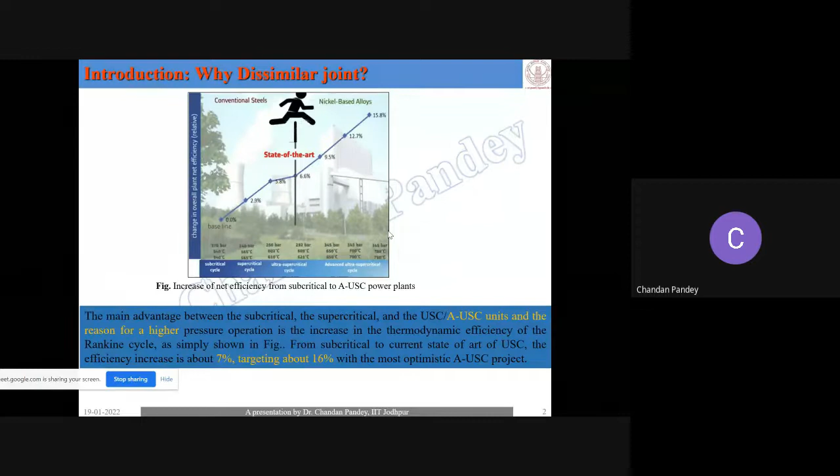So in that case, again, we need dissimilar joining of these two materials. So ultimately, to improve the design and to reduce the material cost, we need dissimilar joining of two different grade materials.

Now, these are the different materials that we use. If we talk about the simple joining of dissimilar materials, the most commonly used dissimilar joining is between chromium molybdenum steel, used in power plants — P91, P92 — and austenitic steel, used in petrochemical industry and others.

Similarly, joining P91, 92 with nickel-based super alloy is used in nuclear grade power plants; austenitic to duplex or martensitic to duplex is used in navy sections and others; copper-steel, copper-aluminum joining is used in aerospace industry.

So there are many industries using dissimilar joining of two different grade materials. The dissimilar material joining has various industrial applications, and it is most frequently used in power plant, chemical and petrochemical industries.

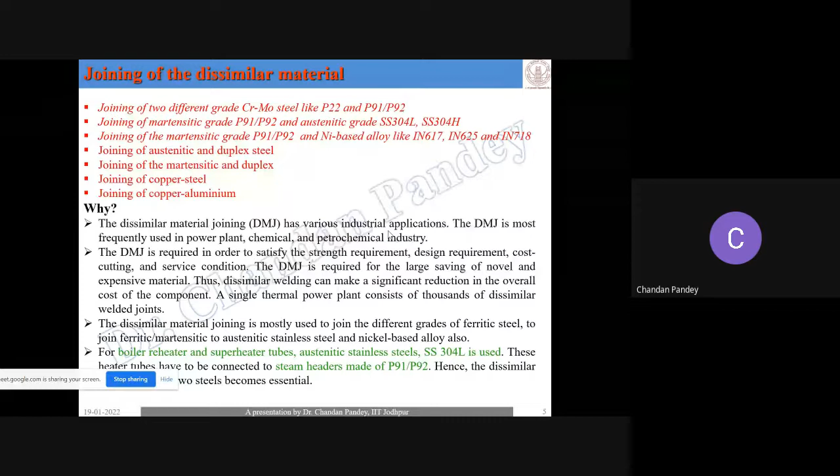Generally we use dissimilar joining to save the novel material and to minimize the cost of that advanced material, and we use different approaches for that.

This is a simple example of a boiler header section where we use two different grade materials exposed at different temperatures. The lower portion, called the steam header, generally operates at a temperature of 600 to 620, and is made of the advanced grade material P91. The upper portion, made of tubes and others, operates at a lower temperature in the range of 450 to 500, and is made of a low alloying element called P22 steel.

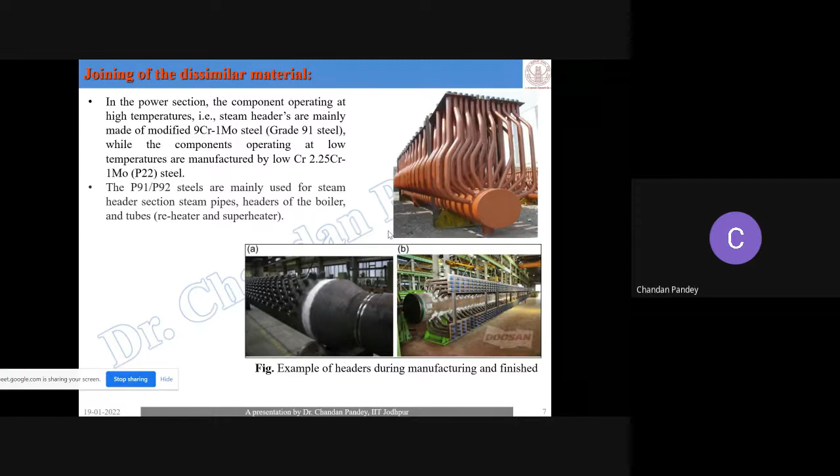Similarly, we use dissimilar joining of materials in other industries also. Now let's come to the topic of design of welded joints — after getting that dissimilar joint, what parameters we consider to design a component or design the welded thing.

Weld joints that we design may be subjected to a variety of loads. First thing that comes to mind when designing anything is the application. The weld joint is subjected to a variety of loads ranging from simple tensile load to complex combinations of torsion, bending, shearing and others.

Similarly, if you talk about high temperature material, it is subjected to residual stresses and high temperature tensile stresses. Once your power plant operates at high temperature and then comes to lower temperature, you will get some amount of thermal stresses and their variation. So there are a variety of applications and a variety of loads where it operates.

The first thing that comes to mind during weld design is the application where we are going to use that joint and what type of loading we are going to apply for that purpose. The capability of that weld joint to take up the given load comes from the metallic continuity across the members being joined.

If you are going to join two members, there should be homogeneity of mechanical property throughout the section. So generally the major problem in a welded joint, if you are going to join two plates or two materials, due to the application of high heat and due to variation in chemical composition, mechanical property, and microstructure, we face so many problems related to heterogeneity in mechanical property.

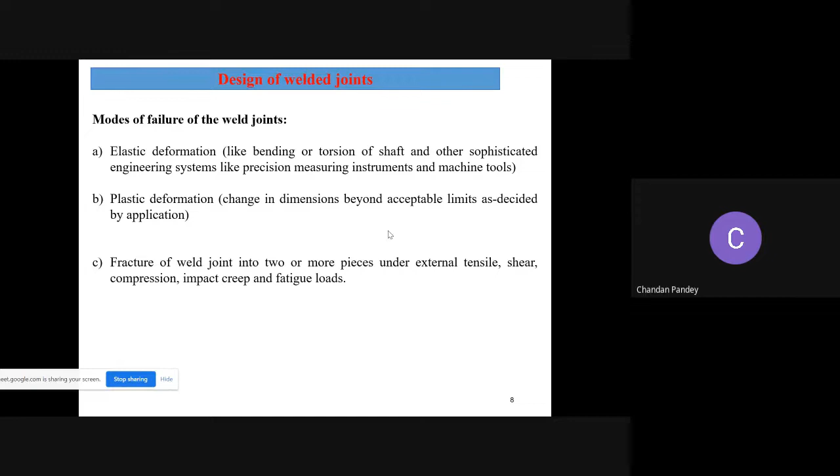While under fatigue and creep conditions, design of a weld joint is based on a specialized approach, which we will discuss later. Under simplified conditions, design for fatigue load is based on the endurance limit of the product. So for different types of loading conditions, we use different criteria to get the final design of the product.

Now, if you talk about the factors which affect the performance of the weld joint - before coming to the design part, I'm discussing the main factors we consider. The welding procedures used for developing a weld joint include edge preparation, plate preparation, weld joint design, type of weld, and number of passes.

First, about edge preparation: generally if your plate thickness is 5 or 8 mm, you can simply join that plate without application of filler metal. There are three different types of welding - I think you all know about these: homogeneous, heterogeneous, and autogeneous. Generally, in case of autogeneous welding, if you are not going to use any filler metal, it comes in the group of autogeneous welding process, and we can simply join the plate just by application of heat. Up to 8 mm, it is easy to fabricate a weld joint, but if the thickness is more than 8 mm, it is not easy to penetrate the heat beyond that.

So in that case, we prepare the edge. We perform edge preparation at the end or side of the plate, and we create different types of groove geometry - V groove, narrow groove, and others.

The first thing we consider is the edge preparation and weld joint design, which comes under the type of geometry used for plates having thickness more than 8 or 10 mm.

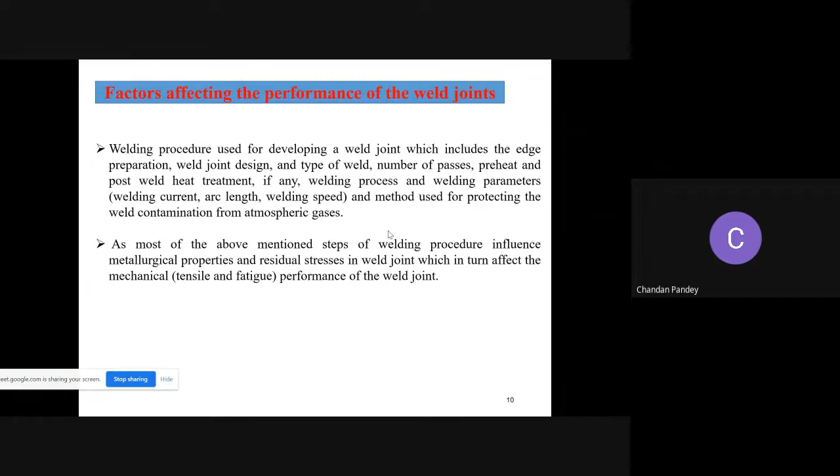So this is about the factors affecting the performance of the weld joint and the parameters that we consider during the design of the weld component.

Now, next, design of weld joint and the loading condition. Design of weld joint for static and dynamic load need different approaches, because in case of static load, it is clear that direction and magnitude become either constant or change very slowly, so we can neglect that. But in case of dynamic loads such as impact, fatigue, thermal stress and others, we get continuous change in loading condition. So the design criteria for the dynamic case will be different compared to the static one.

And in case of fatigue loading, both magnitude and direction of load may fluctuate. So under static loading condition, a low rate of loading increases the time available for localized yielding. That means in case of static loading, once a crack initiates, it takes enough time to propagate, because at the tip of that crack we get plastic deformation.

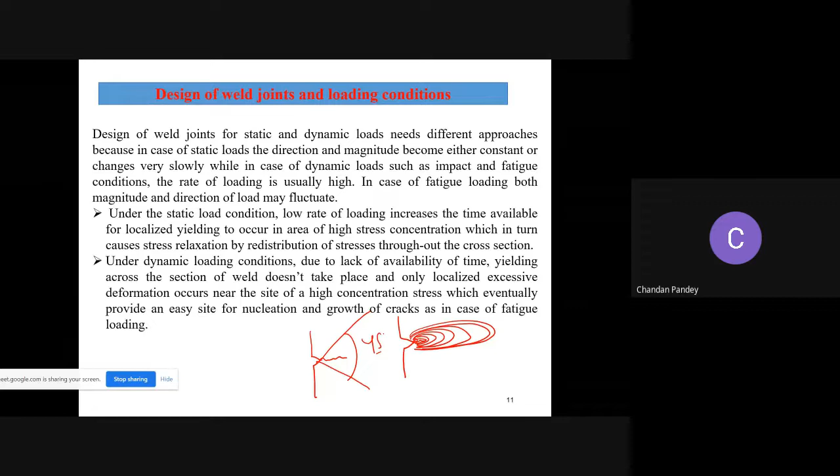But in case of dynamic loading condition, once a crack initiates, you get sudden fracture, and generally it takes place at an angle of 45 degrees. So in both cases, we use different approaches to design, and different weld parameters are considered for the static one and for the dynamic one.

Before that, the next important thing is about the welding symbol and type of welding geometry that we use to get a proper weld joint.

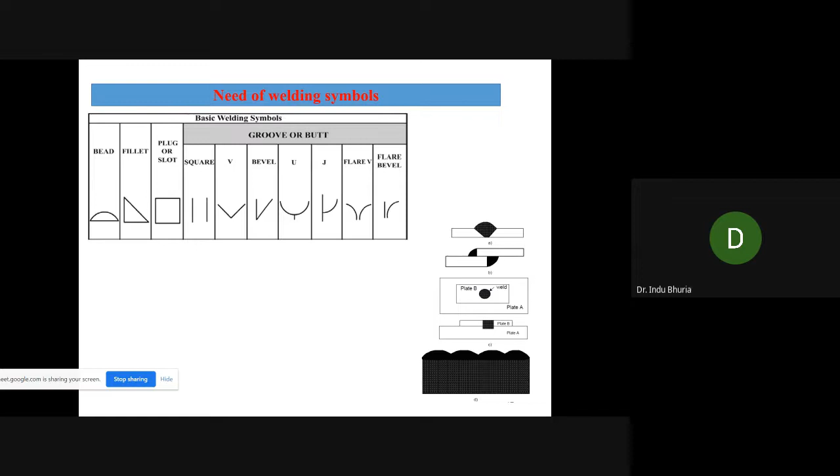So next is about the need for welding symbols. We use different types of welding symbols for different things. The first thing is, welding is not just about joining. Sometimes what we do is utilize filler metal to deposit a layer over the surface of the workpiece to enhance mechanical properties, similar to material science and heat treatment.

If you know about that, there are processes like carburizing, nitriding, cyaniding and others. In those cases, we add elements like carbon, nitrogen and others, and diffuse them into the surface to enhance mechanical properties, especially wear resistance and hardness of the material. Similarly, in welding, we can utilize filler metal or filler rod to enhance the mechanical property of the surface.

So if you are going to deposit a layer over the surface of your workpiece, that is called bead on plate, generally represented by the first one, your bead on plate, just a deposited layer over the surface of the workpiece to enhance mechanical properties.

Especially during the process of joint design, the important thing we consider is the welding parameter and the weld bead geometry. So generally, if you want to optimize the welding process parameters on the basis of weld bead geometry, here's what we do.

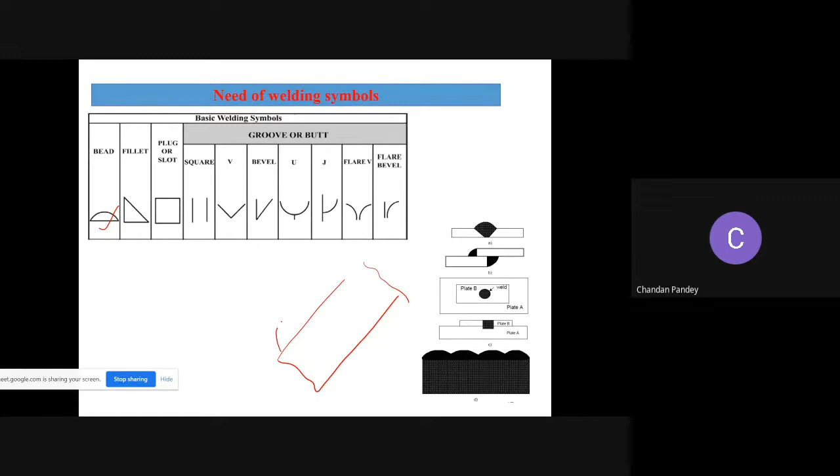For different parameters, suppose this one is the plate, and for different welding parameters we deposit a layer over the surface of the workpiece. After that we cut a cross section, and after grinding, etching and polishing, we check the depth of penetration and bead width.

So generally, on the basis of that depth-to-width ratio, we select the optimum welding parameter for that process. So that is about your bead on plate.

Second one, that fillet weld—in that case both plates will not be in the same plane. And plug or slot, that we use in case of your resistance welding process.

After that, the most commonly used one, that is your butt joint. In your butt joint, there are so many symbols: square, V, bevel, U, J, and others. So generally, if you talk about the square joint—if you are going to produce a weld joint without any edge preparation, without creating any groove—that comes in the group of your square butt joint.

We use that in case of laser welding, electron beam welding, or autogenous gas tungsten arc welding process. Now it is suitable for plate thickness up to 8 or 10 mm. If the thickness is more than that, we create a different type of groove geometry, and on the basis of the groove geometry we use different types of symbols.

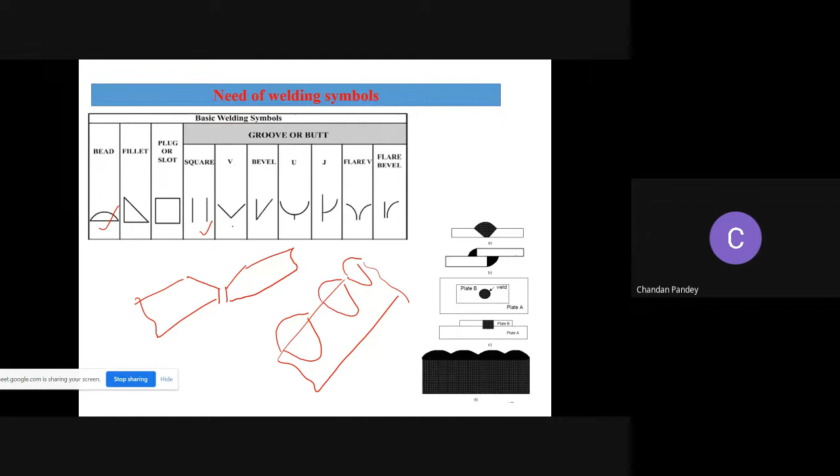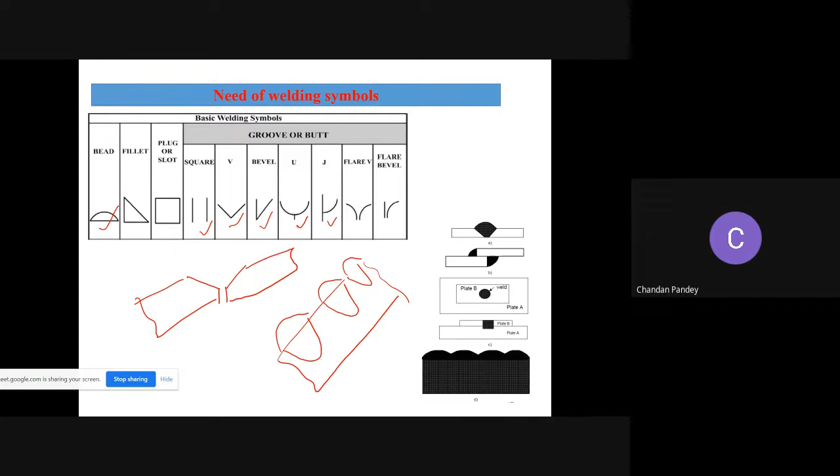Suppose the groove geometry is like this: this one is your first plate and this one is your second plate. So here the geometry, the symbol that we use, that is called your V groove. If we create the geometry in one plate and the other plate remains as such, then it is called your bevel. After that we create U, J. Later I will discuss their advantages and disadvantages, why we are going to create that one.

Now, the next thing we consider in weld joint design is the type of joint we are going to produce during the process. There are 5 types of joints we use in welding: butt joint, lap joint, corner joint, edge joint, and T joint.

Now, if you talk about the butt joint—if both plates are in the horizontal plane and aligned with a maximum deviation of 5 degrees, then this joint is called your butt joint. The maximum deviation allowed is about 5 degrees.

After that, your lap joint: if the plates overlap, meaning both plates are not in the same plane, then it is called your lap joint. Here, this is about your lap joint.

Corner joint—that is made by melting the corner of 2 plates being welded, and therefore the plates are approximately perpendicular. Here we can keep the angle in the range of 75 to 90 degrees.

If we talk about the edge joint, that is made by melting the edges of 2 plates to be welded, and therefore the plates are almost at an angle of 0 to 5 degrees.

And T joint—if both plates are at 90 degrees, then we can say that is about your T joint. So these are the common types of joints that we use in the welding process.

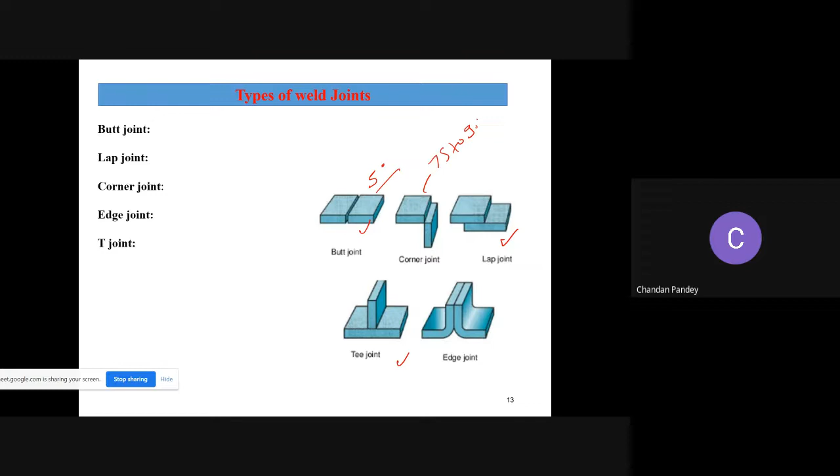Now, the next thing we consider about weld joint design is the welding position, meaning in which position we are going to perform the welding. So in welding, that is very clear—that is about the transfer of metal.

If we draw a simple rough diagram of welding—suppose this one is the plate, and here there is the filler metal. With the help of the filler metal, we deposit a layer over the surface of the workpiece. Now this is not just about the deposition of the layer—there are a number of forces involved during the transfer of the molten metal from that tip to your workpiece surface.

Especially we consider 2 types of force: one is your gravity force, and one is your surface tension force. Now, in case of welding, generally your gravity force acts in the downward direction, acting as a detaching force, and it allows the flow of molten metal from your electrode tip to your workpiece surface.

If we talk about the surface tension force, that acts as a retaining force and retains the liquid metal droplet at the tip of your electrode surface. So generally, we get the transfer of metal from the electrode tip to the workpiece surface when the surface tension force reduces, or you can say when the gravity force exceeds the surface tension force. So now the welding position plays a major role during the transfer of the metal.

In flat welding process, the plates to be welded are placed on a horizontal plane, and the weld bead is also deposited horizontally. This is one of the most commonly used and convenient welding positions to get a proper weld joint. In flat position welding, it is easy to transfer the liquid metal droplet from the electrode tip to the workpiece because gravity acts in the downward direction.

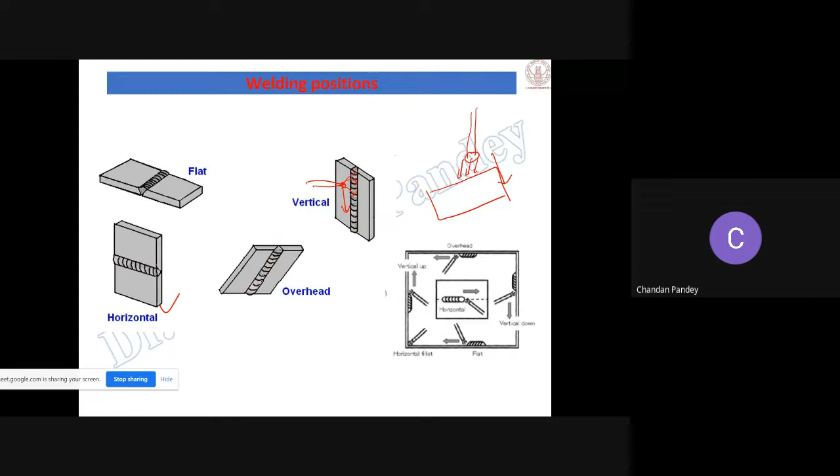Now, after that, the next one is about groove application. For this, which type of groove is required depends on thickness - up to 8 mm thickness is okay, and by using autogenous welding we can make the joint. But if the thickness is more than that, we prepare a groove, generally U, V, and J type grooves. So here we prepare two types of groove: either single groove weld or double groove weld.

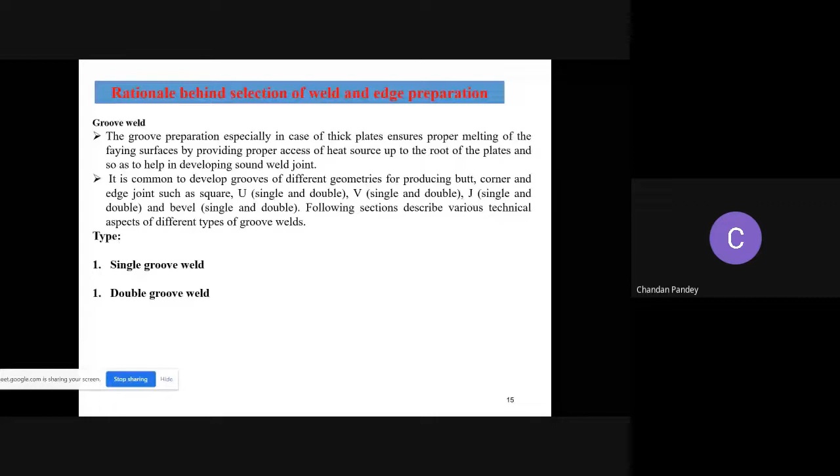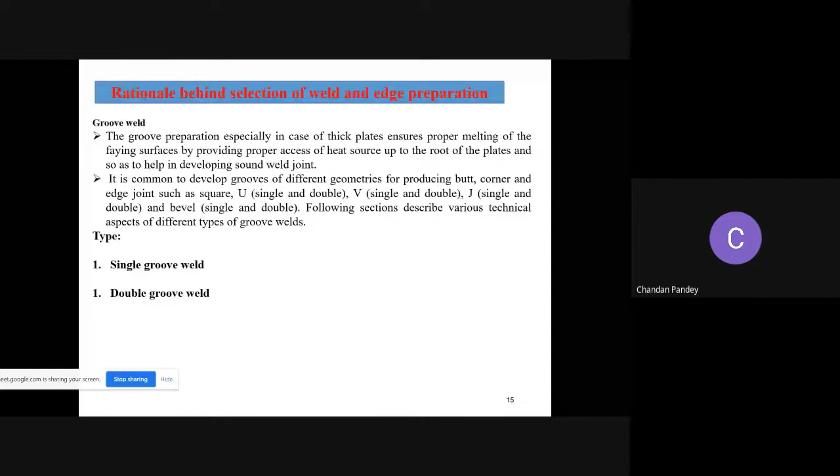If you talk about single groove, it means preparation of the plate to produce a groove from one side only, resulting in just one face and one root of the weld. While in double groove, preparation is needed from both sides of the plate. So if you talk about single V, that is like this - this is the plate. In case of double V...

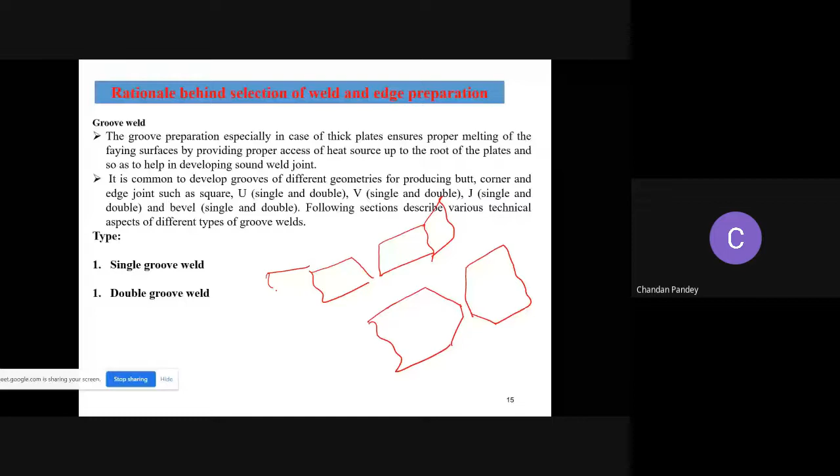Single groove weld is mainly used for plates of thickness more than 5 mm and less than 15 mm. Less than 5 mm, it is okay to join just by application of heat. Up to 15 mm, we can use single groove weld. This bench is not very hard and fast, and it depends upon the penetration capability of the welding process. We also consider the distortion that comes during welding - the plate gets distorted due to application of heat, resulting in angular distortion like this. So we also consider the distortion and residual stress in the welded joint. On this basis, we select single groove weld for the plate, generally up to thickness of 15 mm.

Now the second one is double groove weld. Double groove preparation is used especially under two conditions. First, if thickness is more than 15 mm, generally we prefer thickness more than 25 mm, where desired penetration up to the root from one side is not possible. Second, we consider distortion control. In single groove weld, the major problem we face during design is the distortion that comes in the picture. So if the distortion is too high, we prefer the double groove weld, and we can compensate - meaning during deposition on one side, suppose we get distortion like this.

During the deposition on the second side, again you will get distortion like this. So you can compensate for the distortion that comes in the picture. For that, we prefer that double groove weld.

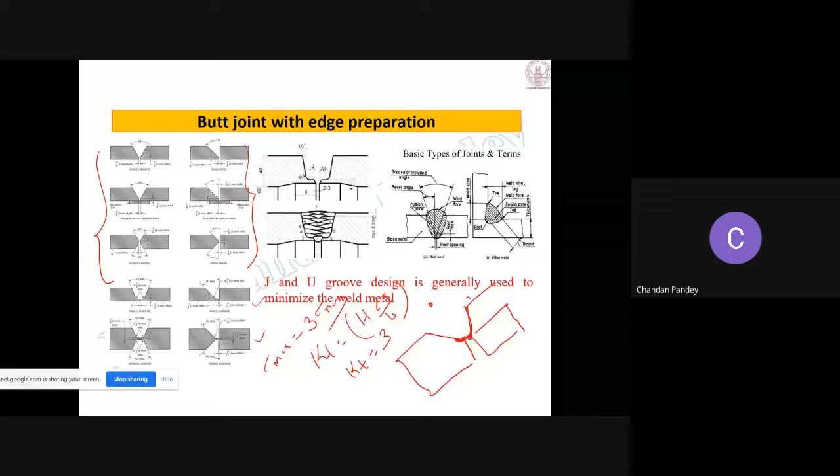So considering these factors, we provide some amount of radius over there. Meaning we remove that sharp corner and provide some amount of radius to overcome the problem related to stress concentration. So now, the most commonly used ones are V groove joint, bevel groove joint, and after that U and J groove joint.

Now if you talk about U and J groove geometry, that is more economical in terms of the volume of metal deposited, because the distortion and residual stresses that come in your weld joint depend upon the overall heat input and overall deposited metal on the surface of the workpiece. So if somehow we can minimize the deposition of metal and overall heat input, we can control the problem related to residual stress and distortion.

So in case of U and J type groove geometry, the volume of weld metal to be deposited is less, and that's why it offers less distortion and residual stress related problems, and besides, it allows for higher welding speed.

But these groove geometries suffer from difficulty in machining. Meaning it's not easy to create a groove geometry like this, it is difficult to machine. That is the problem associated with U and J. But the advantage is that it offers less deposition of metal, and that's why we get good mechanical properties due to the lesser amount of distortion and residual stress.

Now about your V and bevel groove geometry, that can be easily and economically produced by machining or flame cutting. So it is easier to process and manufacture V and bevel groove geometry as compared to U and J groove geometry.

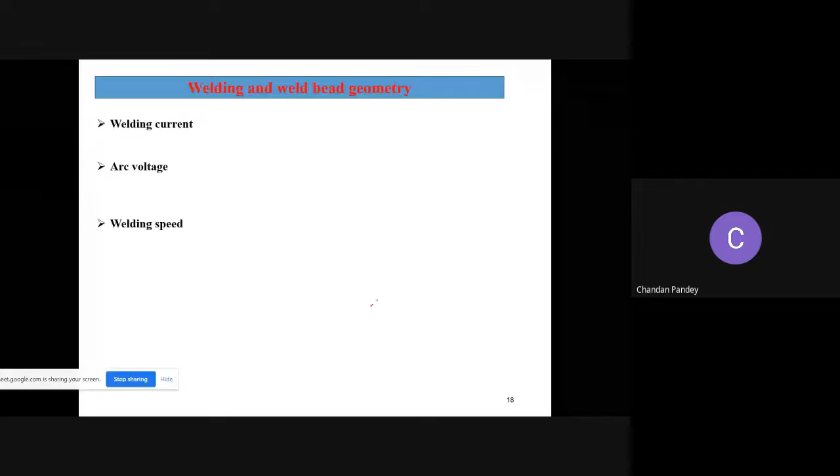Now, after that, the other thing we consider is the welding and weld geometry, because the overall performance of that weld joint depends upon one parameter, that is the weld bead geometry. Here there are two things: one is the depth of penetration, and the second is the bead width.

So bead width and depth of penetration are, we can say, the cross-section area of the weld joint, and that depends upon the current, voltage, and your travel speed. This is generally common and detailed, so I'm not going to discuss it in depth.

The depth of penetration is associated with the current. By increasing the amount of current, we can increase the depth of penetration, but beyond the limit it will create problems like melt-through. Similarly, if you talk about the factor associated with bead width, by increasing it we can increase the bead width, but beyond the limit it will show problems like concavity and convexity. That's why we avoid too much voltage; there should be an optimum level.

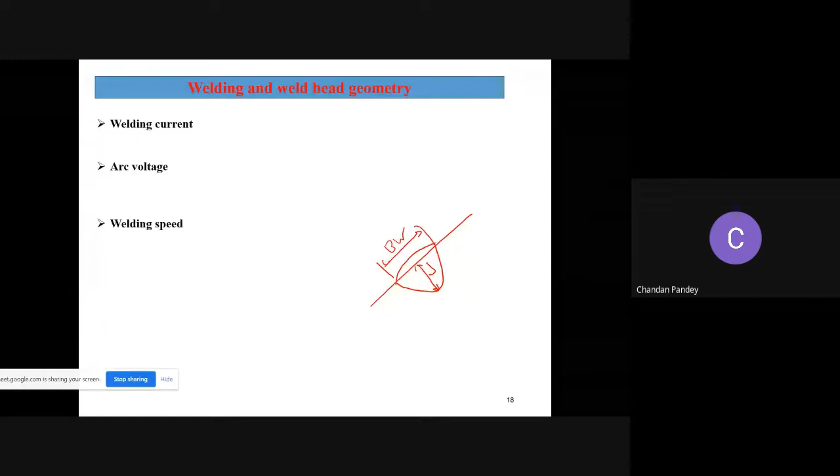If you talk about welding speed, after welding current, the most important parameter that affects the depth of penetration is the welding speed or travel speed, which is again associated with depth of penetration. So by optimizing these welding parameters, we can optimize the weld bead geometry, and ultimately improve the performance of the weld joint.

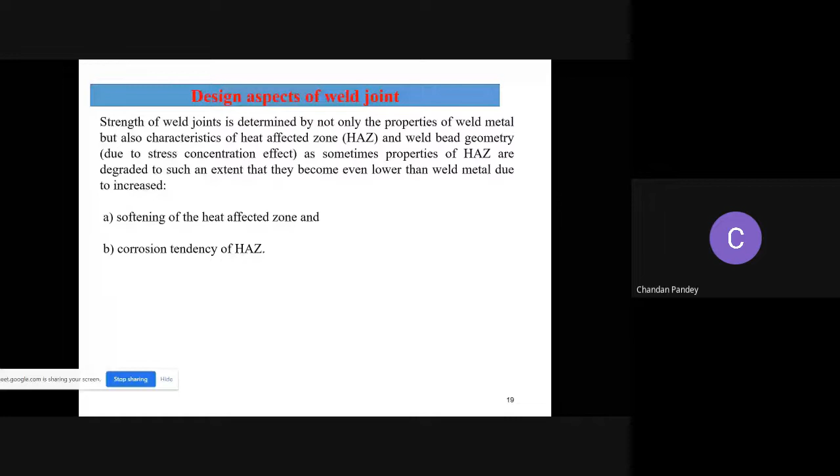Now the other thing we consider is the formation of the heat affected zone. The overall performance of the joint doesn't only depend upon the weld bead area, which is important, but also on the formation of the heat affected zone.

The formation of the heat affected zone depends upon the material we are going to weld. Different types of material offer different thermal conductivity, and the heat affected zone formation depends upon the flow of heat from the weld into the region of the base metal. So generally that depends upon the thermal conductivity.

If the conductivity is more, in that case we get a wider range of the heat affected zone, and the strength of the heat affected zone may be more or less compared to the weld metal. So that contributes heterogeneity to the weldment and creates problems related to failure of the weld joint, so we also consider that.

After that, there is formation of new grains in the region of the heat affected zone due to recrystallization, and that offers a higher tendency for corrosion in corrosive environments, which again creates problems and ultimately affects the overall performance of the weld joint.

So up to here, this is all about the basic things we consider to make a proper weld joint in case of weld joint design.

Now after that, let's come to the point of dissimilar joining. Until now, if you have any doubt or questions, you can ask related to that. Is it clear about the basic things of welding?

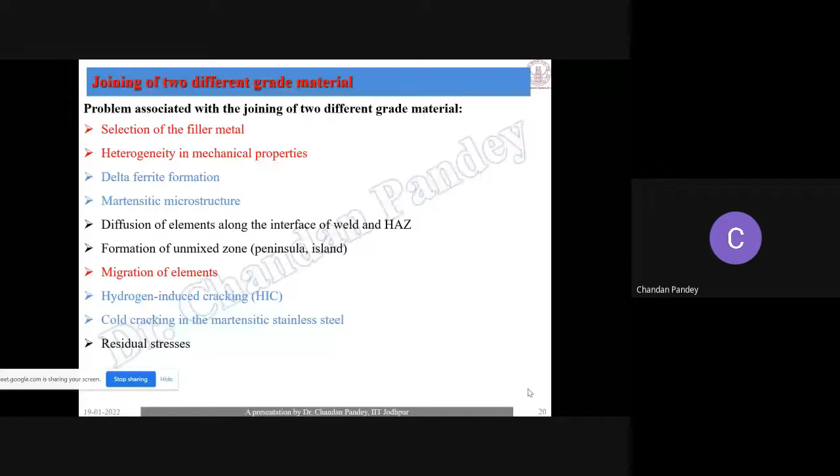Now, if you talk about dissimilar joining, it is not possible to select a filler metal with matching composition of both plates. You have two plates of different composition, so you select the filler metal having composition similar to either plate, depending upon your requirement. But that creates a big problem. Suppose you have two materials, one is mild steel and one is austenitic steel. The composition of both are different, so it becomes very difficult to select either matching composition with your mild steel or matching composition with your austenitic steel.

So that is the first thing that creates the problem, selection of filler metal. After making a number of tests, joints, and complete characterization - metallography and mechanical characterization - we optimize the composition of the filler metal for any type of process.

After that, heterogeneity in mechanical property - that is very common, because of the application of heat, heating and cooling at high temperature and low temperature.

But the problem is that in case of dissimilar welding, heterogeneity doesn't come only due to the application of heat. It also comes due to the application of filler metal with composition not similar to the base metal. And if the composition is not the same, that filler metal will solidify in a different nature compared to the two base metals.

So that creates a problem like heterogeneity in mechanical property. After that, some soft patches or soft delta ferrite formation.

Again, that is material specific. In case of steel, if there is an austenite stabilizer, that will lead to the formation of austenite. If there is a ferrite stabilizer like chromium, molybdenum, and tungsten, that will lead to the formation of delta ferrite. Again, that will create heterogeneity during the dissimilar joint.

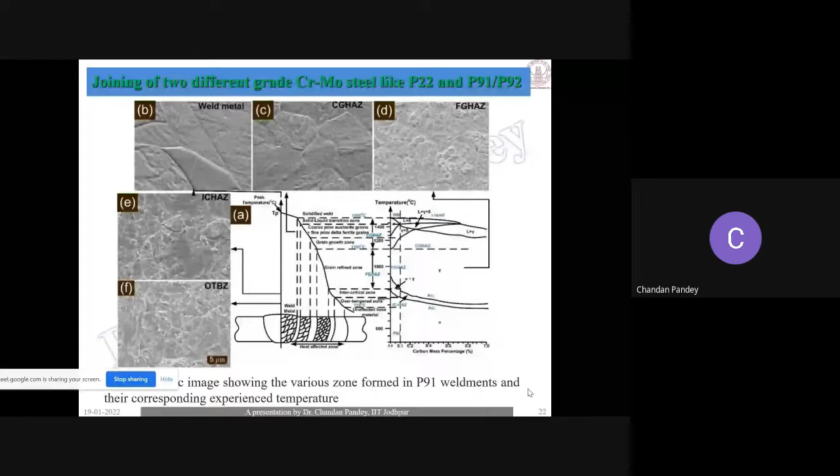Now the second thing - the part of the base metal affected by heat is called the heat affected zone. This depends upon the overall conductivity of the base material. If the conductivity is higher, like in chromium-molybdenum steel, we get a wide heat affected zone. In stainless steel, where conductivity is very poor, we get a very narrow heat affected zone. Generally, a narrow region does not create problems during service condition, but in a wide region, we get continuous change in microstructure and mechanical property as we move from the fusion boundary to the base metal through the heat affected zone.

So generally, in material having higher thermal conductivity, there are different types of zones. The first region, very close to the fusion boundary, is called the coarse grain heat affected zone. The region just away from that is called the fine grain heat affected zone. And the region at the interface of the weld metal, base metal, and heat affected zone is called the intercritical heat affected zone.

Now we come to the first one - the coarse grain heat affected zone. The region of the base metal just near the interface experiences the maximum temperature, which is above the upper critical temperature of that material. Due to that, we get complete dissolution of the precipitate.

Why is it called coarse grain? Because the precipitates present at the grain boundary provide a pinning effect to the grain boundary. Due to dissolution of that precipitate, the grain boundary becomes free, and once it becomes free, it will grow in all directions, resulting in the formation of coarse grain.

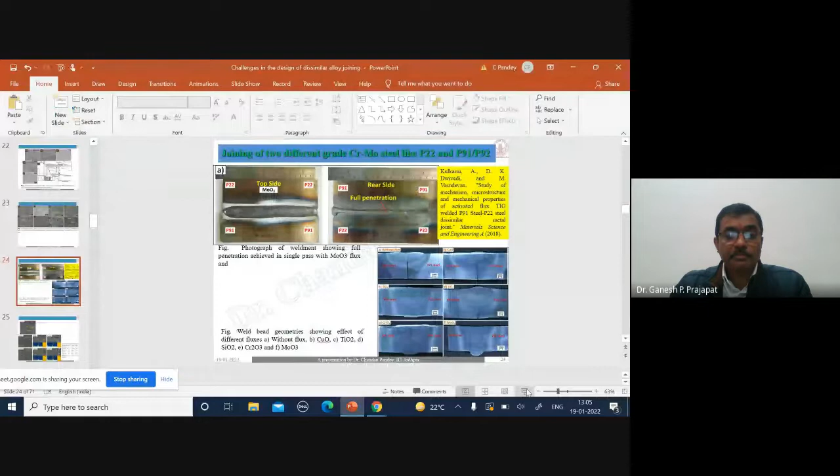Now, as I discussed, the major problem associated with welding dissimilar joints using the TIG welding process in multi-pass is the wide range of the heat affected zone that creates heterogeneity in the overall weldment.

So how can we minimize that problem? There are two or three things we can use. First, we can change the process, like from multi-pass TIG welding to autogeneous laser beam welding, autogeneous TIG welding, electron beam welding, or activated TIG welding process. In all these cases, we get a small or narrow heat affected zone.

But the problem is that all these processes can only be used to join plates of thickness up to 10 mm; it is not possible to get penetration more than that. Some research has been published related to the activated TIG process for dissimilar joining, which is a more convenient way to get a joint of plate thickness up to 10 mm for different types of materials.

So what parameters do we consider in activated TIG? The main important parameters are welding current, voltage, and other things. But the next thing we consider in the activated TIG process is the application of the flux.

Generally we use different types of flux layer over the surface of the workpiece, and due to that we enhance the penetration in that process. So first, after optimizing the welding parameters, the second thing we consider is optimization of the flux for penetration, using different types of flux for dissimilar joining of P91 and P22 steel.

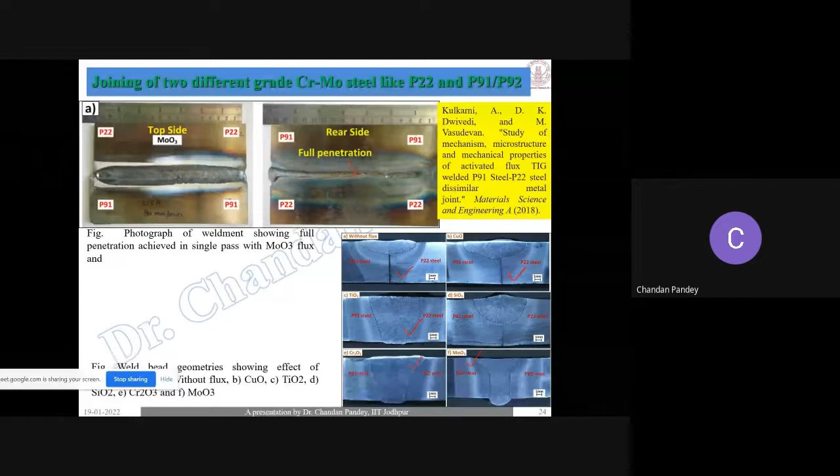Now the second thing, for activated TIG process, as I discussed, in case of multi-pass TIG we get a wide range of heat affected zone, and we get variation in microstructure and mechanical property along that region. But for activated TIG, the overall width of the heat affected zone will be less compared to multi-pass welding process.

Similarly, in case of laser beam and electron beam welding process, due to the high power density, we get a narrow region of heat affected zone as compared to multi-pass TIG. So due to that, we can minimize the overall heterogeneity across the joint.

But the problem is that we still get a different region, the region just near the interface, that is your coarse grain region, which will show different microstructure and mechanical property. After that, the last region of the heat affected zone, the intercritical heat affected zone, will show different mechanical property compared to the others.

So this is about the variation in mechanical property along the weldment, and how autogenous welding processes like activated TIG, laser, and electron beam welding are helpful to enhance the mechanical property or reduce variation along the welded joint.

Now I come to friction stir welding, which is very common in aerospace applications, because in aerospace we don't prefer additional material - we want to keep the weight lighter, so we don't prefer filler metal, because adding filler metal ultimately increases the weight of the overall welded structure. That's why we prefer friction stir welding.

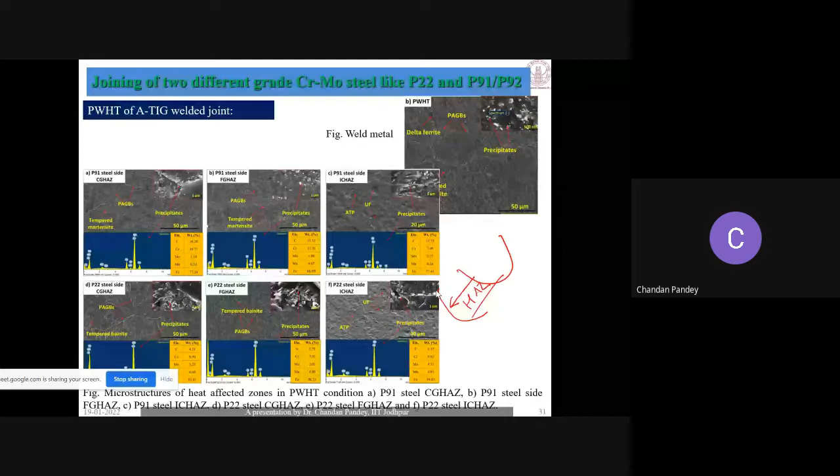On the other side, due to the movement and diffusion of carbon, we get the formation of carbon depleted and carbon enriched zones. So that will create problems. So on one side you are getting the benefit, and on the other side you are getting the loss due to the heterogeneity caused by the diffusion of the carbon element.

Now, if we talk about the effect of heterogeneity on mechanical properties, in that case I discussed there are dissimilar plates, so we get heterogeneity throughout the weldment. How will you measure that heterogeneity?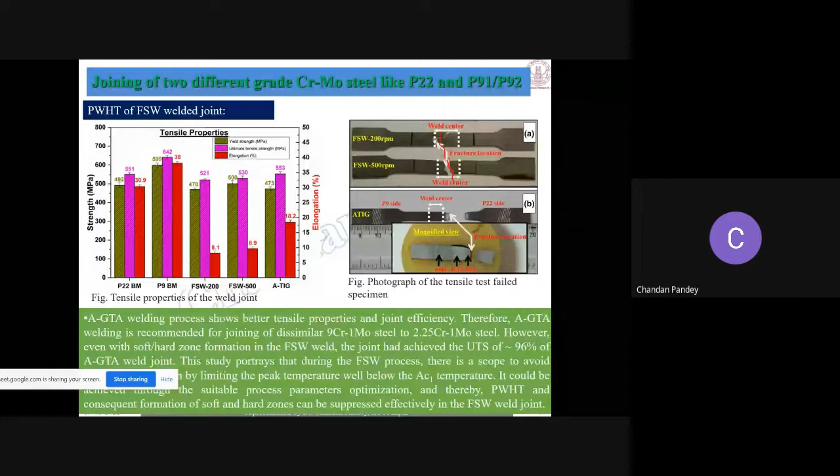For different types of joints, if we talk about friction stir welding, due to improper mixing in the region of the weld metal, we get failure from the weld metal region during service condition, or even during the as-welded condition, not in service. If we perform the tensile test, we get failure from the weld metal region, and the tensile strength is lower than the strength of the base metal. So in that case, we don't prefer that type of joint. That is the problem related with friction stir welding if used for steel plate and steel material.

Now come to the service condition. This is a steam header section made of F91 material, and there are many steam tubes made of P22 steel. Here there is dissimilar joining at that point. After that, it is exposed to a temperature of 570 degrees Celsius for a period of 79,000 hours. During that period, as discussed, we put that weld joint in service condition just after post-weld heat treatment. Just after post-weld heat treatment, we get a narrow region of soft zone and hard zone.

Generally, we get an increase in the size of the soft and hard zone. This is the region of soft and hard zone after that much period of service. Generally, after using that joint, we get failure from that point during service condition. That's why we should take care of the formation of soft zone and hard zone during service condition, and how we can minimize those things.

If we categorize that region into hard zone and soft zone, we get the formation of many precipitates in the hard zone region and a carbon-depleted region in the soft zone. So that is about the microstructure.

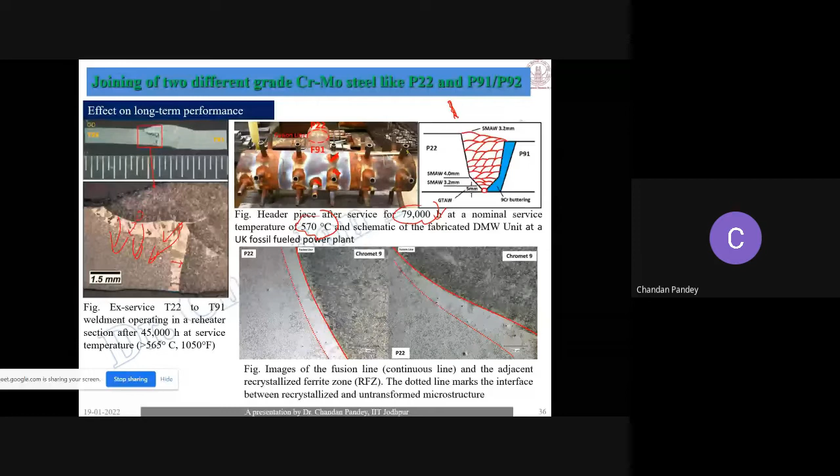Now if you talk about the service condition, that is about long-term service condition. There are two types of service we perform, where the material is subjected to high temperature. In that case, the thermal stress will be something. After that, during cooling, it is subjected to room temperature, and at that point the overall thermal stress will be different. That thermal stress comes due to the application, related with the creep rupture strength and other factors. So during the creep condition, during high temperature and loading of the welded joint, we get failure either from the weak region of the heat affected zone.

I discussed three different regions: coarse grain, fine grain, and intercritical. Either due to heterogeneity in mechanical property along the weldment, we get failure from the region of the intercritical heat affected zone. Suppose this one is the weld joint, and this one is the region of the heat affected zone. Here this is the CGHAZ, this is the ICHAZ. Here you will get the ICHAZ.

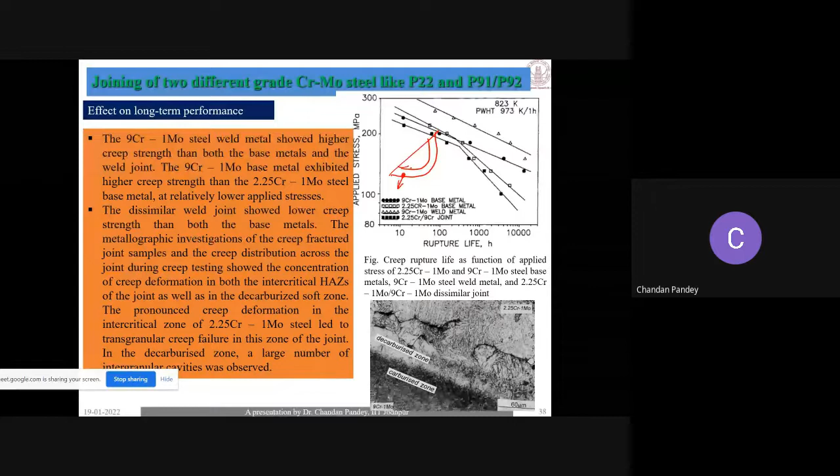So we get failure either from the region of that intercritical heat affected zone, or here due to post-weld heat treatment, we get formation not in the CGHAZ but just near the interface, the formation of that soft region. So either we get failure from crack initiation or failure from the region of the soft zone.

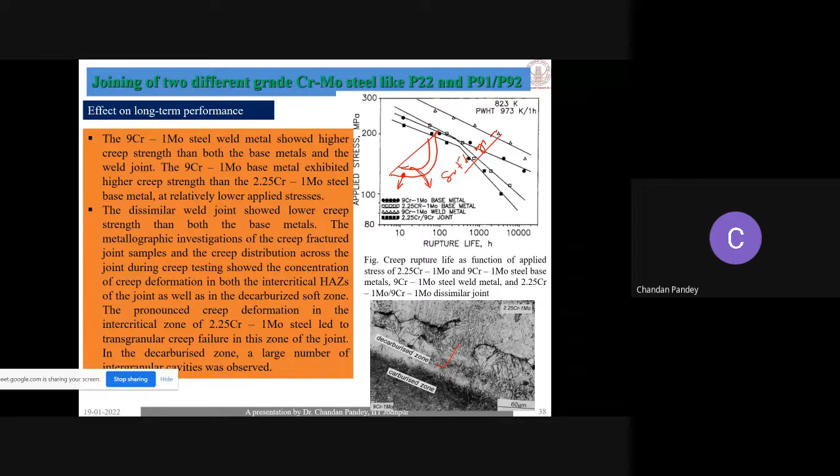Here this is the published work. In that, we get failure in the region of the soft zone that formed just after post-weld heat treatment, and we get failure after a 10,000 hour period of service.

So that is about the major failure that we get in case of your dissimilar joint, especially chromium molybdenum steel dissimilar joint.

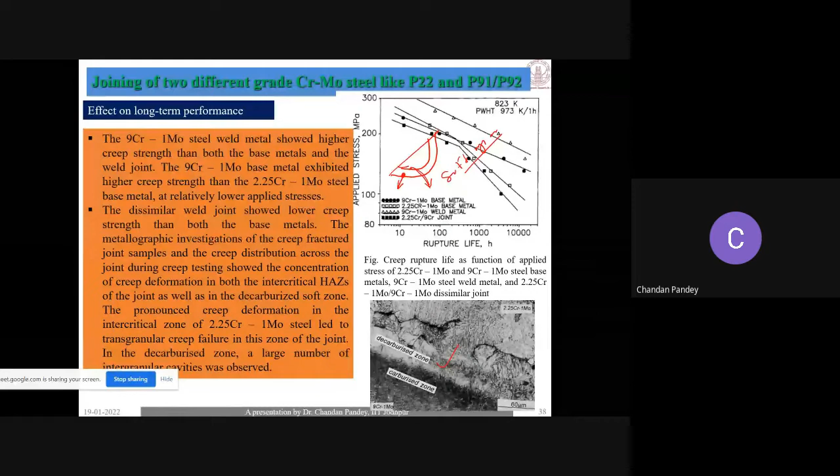Along the boundary, due to diffusion of the carbon, here we get formation of the soft zone. They are depleted of carbon, and that region is called the pro-eutectoid ferrite region. When carbon diffuses from that point and comes along that boundary, there is a presence of chromium, and it combines with the chromium to form a layer of chromium carbide in a very narrow region. So in that narrow region, about microns wide, we get formation of both soft zone and hard zone.

That hard zone is okay, it will not create the problem, but the carbon depleted soft zone facilitates crack initiation during the service condition. So that is the problem during dissimilar joining and service.

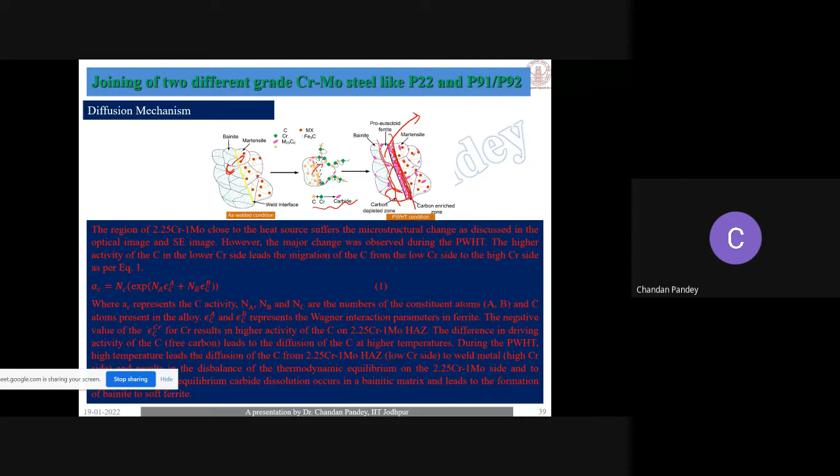So how can we minimize that type of problem, especially for 22 and 91 steel? Some research has proposed the application of nickel based filler. Why go for nickel based filler? Generally, nickel based filler solidifies in austenitic mode, and the end structure of that weld metal will be austenite. If the end structure is austenite, then it doesn't require any type of post weld heat treatment.

Generally we need post weld heat treatment in case of martensitic steel. If we talk about austenitic steel, we don't require any type of heat treatment. That's why we can use nickel based filler, and most commonly we use 82 and 617 Inconel filler to make a joint of 22 and 91 steel.

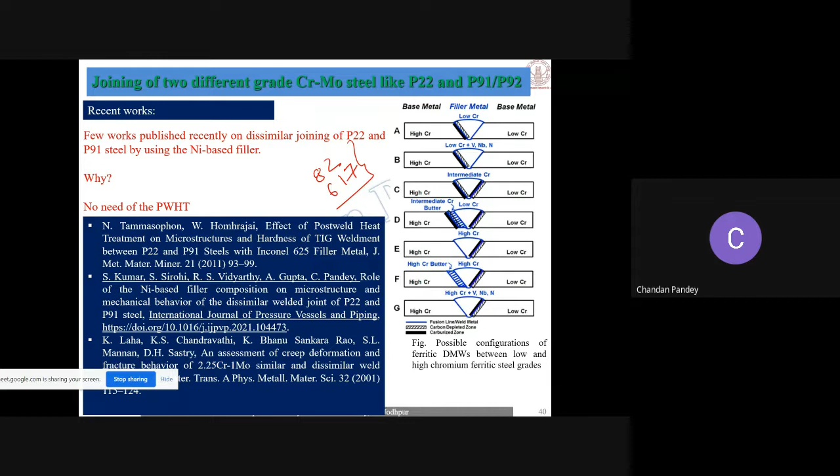We can also use some interlayer to stop the diffusion of the carbon element from one side to the other, or from base metal to weld metal. By stopping the diffusion of that carbon element during post weld heat treatment, we can improve the overall performance of that dissimilar weld joint.

Now again, one problem we face with nickel based filler - we don't require heat treatment, that is okay, but nickel based filler does not match with P22 and P91 steel. In that case, we get formation of an unmixed zone, that is peninsula and island regions in the weld metal just near the interface.

At room temperature service condition, that will not affect the mechanical property of the weld metal. But during the service condition, that may create problems. Research is still going on for that topic - how the formation of that unmixed zone promoted by nickel based filler will affect overall performance during service conditions, and how it will affect the overall mechanical property, because we don't get any effect at room temperature, but at service condition, research is ongoing. So how it will affect things, we don't have any idea about that yet.

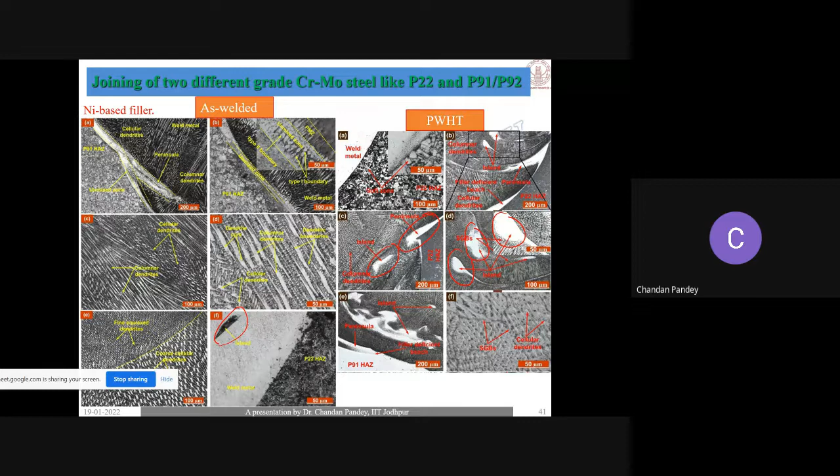This image shows the variation of elements across the interface, and due to that variation, we get formation of the soft and hard zone at that point. We see major variation, especially in chromium, iron, and nickel elements across the interface.

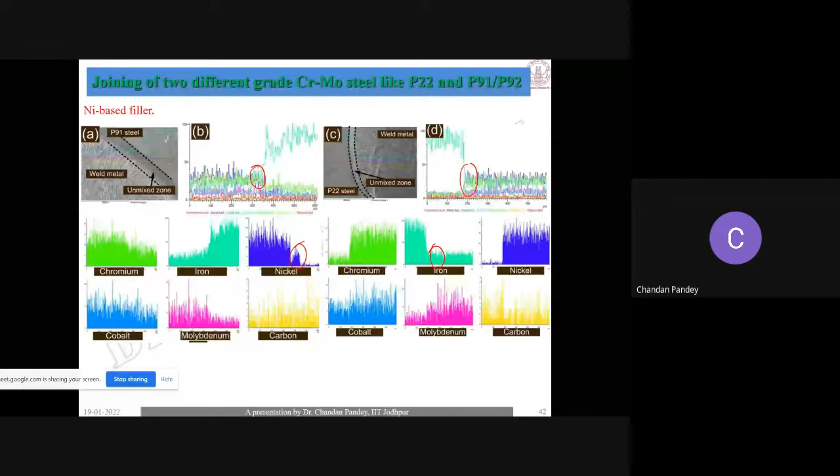Now, the second topic related to dissimilar welding is about the diffusible hydrogen content. Till now, if you are interested to ask any question, you can ask anyone.

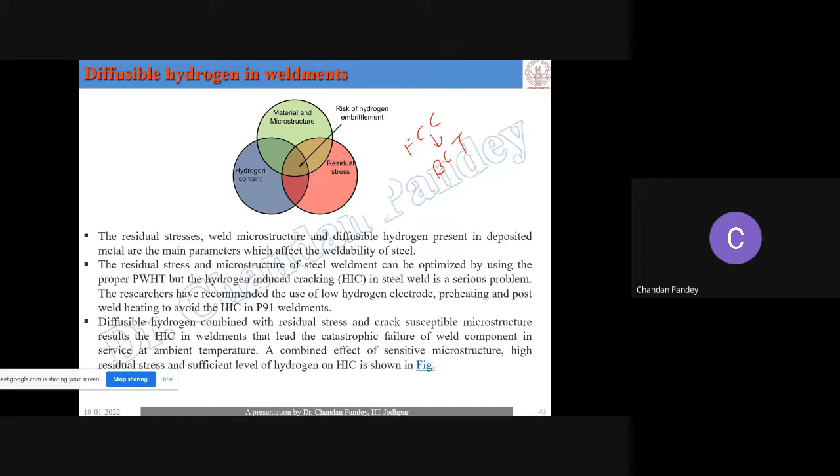Now coming to the first point, hydrogen content: how we can control it and how we measure it. Generally, various methods are proposed to measure the diffusible hydrogen content in the weld metal. It is not easy to measure diffusible hydrogen content in multi-pass welding, but for a fixed, optimized welding process parameter, we can measure the amount of diffusible hydrogen at a fixed level.

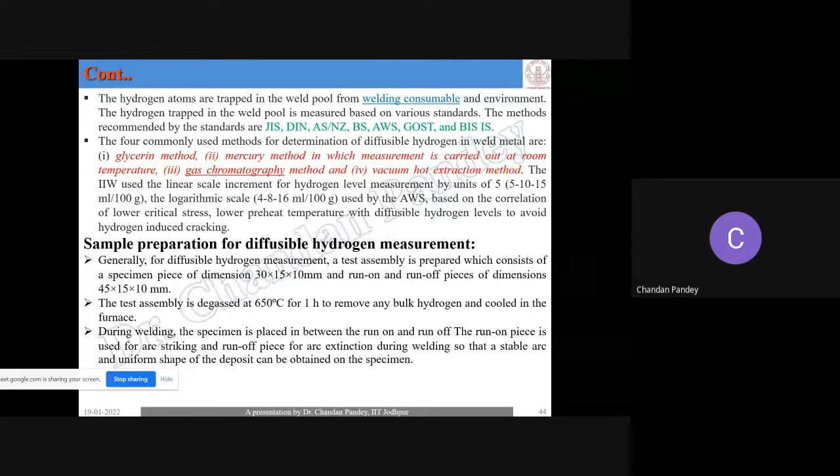So generally what we do is deposit a layer over the surface of the workpiece, cut that layer, and put it into a glycerin or mercury solution. Due to the displacement of that glycerin or mercury solution, we measure the amount of diffusible hydrogen. The most commonly used is the mercury method.

In the mercury method, we prepare a sample like this. There is the sample size, with 3 pieces: 1, 2, and 3. These are called the run-on piece and the run-off piece, and the center one.

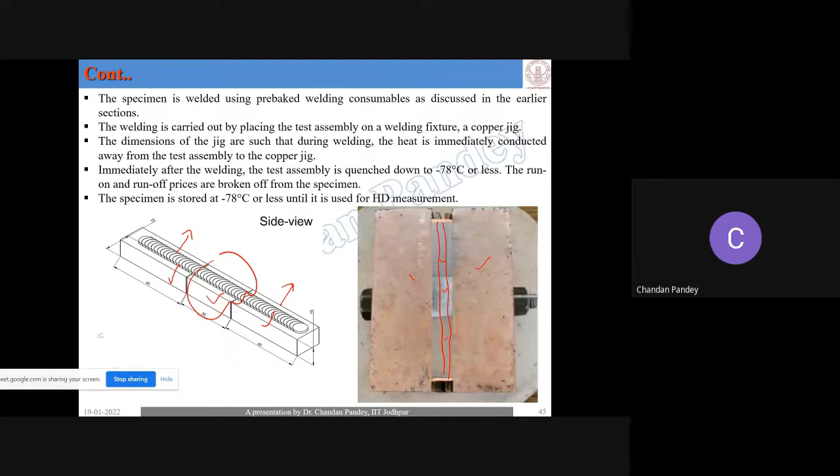The center piece is used to measure the diffusible hydrogen content. After making these 3 pieces, we fix them in the copper fixture, and then we deposit a layer over the surface of the workpiece using the optimized welding process parameters.

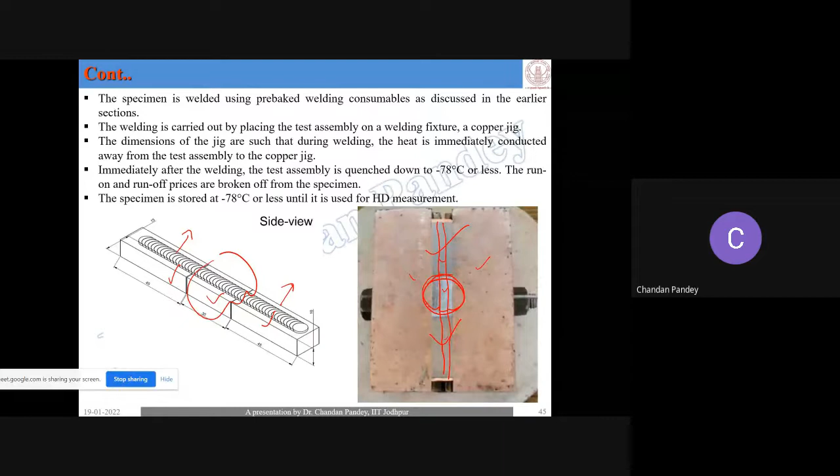After deposition, we remove the run-on and run-off pieces because we only require the center piece. We then immerse the center piece into liquid nitrogen at a temperature of about minus 70 or minus 78 degrees Celsius, capturing the diffusible hydrogen present in that region, since at that low temperature it is not easy for the hydrogen to diffuse from one place to another.

After capturing the hydrogen at low temperature, we put the sample into the mercury or glycerin solution, depending on which process we use. As the sample returns to room temperature, the diffusible hydrogen escapes and displaces the mercury. We measure this displacement, and using a formula, we calculate the diffusible hydrogen content.

This is just after deposition. We remove the run-on and run-off pieces and keep the center piece, which we place in the mercury solution. Using the displacement measured, we calculate the diffusible hydrogen content.

If diffusible hydrogen content is a major criteria for the joint, we can optimize the parameters based on it. Generally, the main factor used to optimize parameters is the weld bead geometry, especially depth of penetration and bead width.

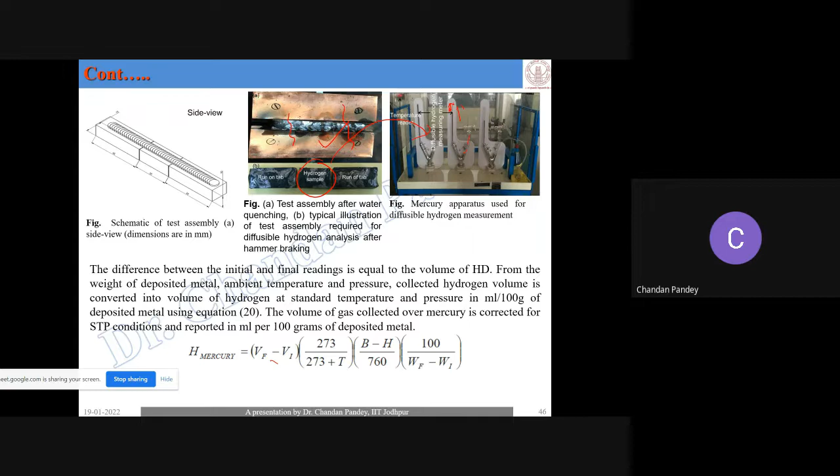But if diffusible hydrogen content or hydrogen-induced cracking is the major criteria, then for different parameters we perform diffusible hydrogen content measurement, and the parameter providing the minimum diffusible hydrogen content is considered optimum for the next process, or the multi-pass welding process.

Now let's move to the next part, about how residual stress is created. One thing to note: if diffusible hydrogen content is small, it won't normally create a problem. But if it combines with a crack-susceptible microstructure, that may lead to catastrophic failure.

It is not required that diffusible hydrogen content be high. Even a small amount of diffusible hydrogen content may create a problem if it combines with residual stress or a crack-susceptible microstructure.

Residual stresses are locked-in stresses present in any type of engineering component, even when there is no external load. They develop primarily due to non-uniform volumetric change in metallic components, irrespective of the manufacturing process, such as heat treatment, machining, mechanical deformation, casting, or welding.

The maximum value of residual stress should not exceed the elastic limit of the metal, because if the residual stress in the weld metal or any manufactured product exceeds the elastic limit of the material, it will create failure of that component. Residual stress, in terms of its nature, may be tensile or compressive.

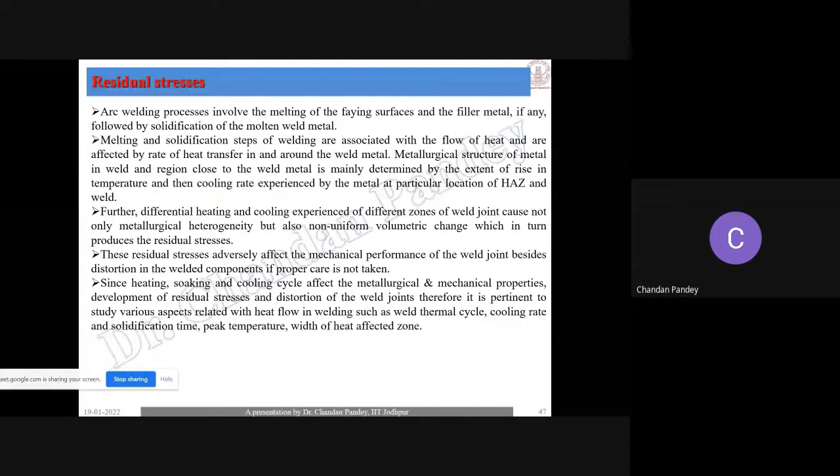If we talk about welding, how can we control residual stress? We cannot completely remove residual stresses in the weld metal, but we can minimize the magnitude by optimizing the weld groove geometry. Residual stress depends upon the amount of filler metal deposited, which is related to heat input. So overall residual stress magnitude depends upon the overall heat input, and by minimizing that heat input, we can control the amount of residual stress.

Suppose I want to join two plates with different groove geometry. One groove geometry is about 70 degrees, and the second, narrower one is about 40 or 45 degrees. In the second case you get less metal deposition, so the overall heat input will be less and the overall magnitude of residual stress will be less. By optimizing the groove geometry, comparing 70 degrees versus 45 degrees, we need less filler metal, so the cost required will be less and the overall residual stress and distortion will also be less.

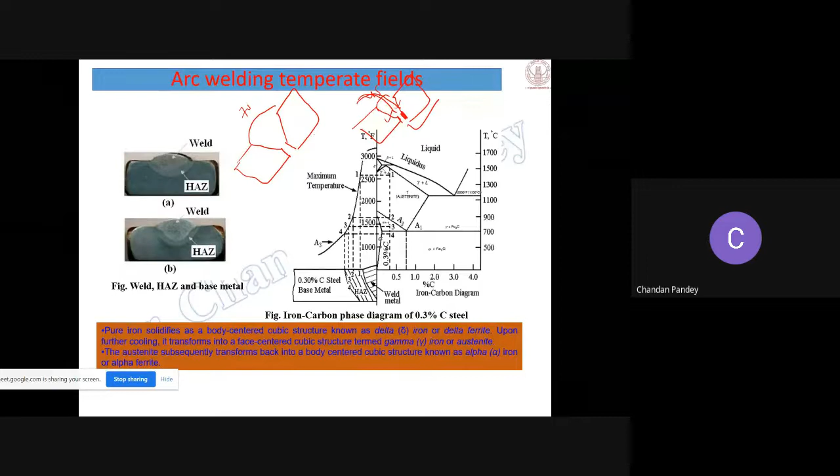So why are we not simply using that 45-degree groove instead of optimizing? The major problem with a very narrow groove design is the application of filler metal — it is not easy to penetrate into the narrow region of the root. That's why we optimize the groove geometry, so we can get proper reaching of the filler metal to the root point. We cannot directly minimize the groove opening angle; we have to optimize the groove geometry, and after optimization we can minimize the heat input and the residual stress for that process.

So the residual stress that comes due to heat input and application of filler metal can be minimized by optimizing the groove geometry. Now the second thing: residual stress that comes due to the formation of austenite to martensite. As I discussed, austenite has FCC structure. In FCC crystal structure, the lattice parameters A, B and C are equal, and alpha, beta, gamma are also equal.

But in the case of austenite to martensite, there is formation of body-centered tetragonal structure, where A equals B but is not equal to C. This causes distortion on one side, called Bain distortion. Due to that distortion we get some amount of strain in the weld metal region. Due to that strain, residual stresses come into the picture, and that we cannot remove by optimizing the groove geometry. To remove that type of stress, we perform post-weld heat treatment just after welding. So that is about residual stress.

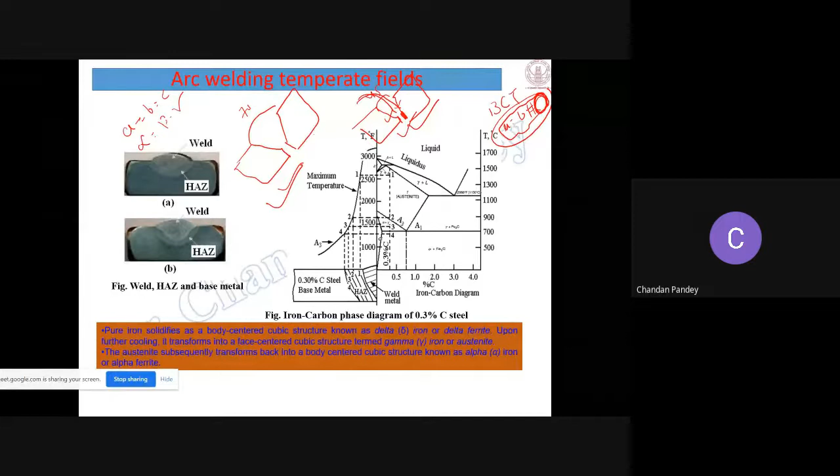This shows the martensitic transformation, and due to that we get an increase in volume, because if A, B, C are equal, the volume will be different compared to when A equals B but not C — meaning there is an increase in the size of C, so we get an increase in volume. Due to that increase in volume, we get a higher amount of residual stresses. Generally, in case of a narrow groove design, we get less residual stress because of the lesser amount of filler and heat input.

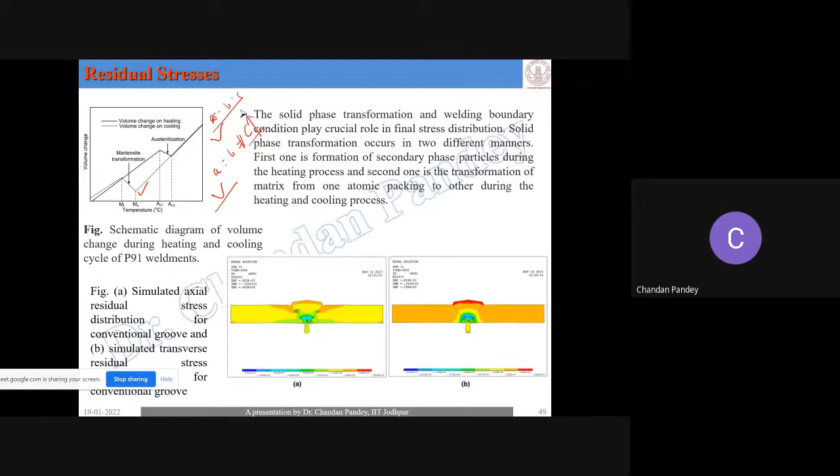There are other geometries we can use to minimize residual stresses, using different groove geometries to reduce residual stress in the weld metal region. The first is the equal double V groove geometry, and the second is the unequal V groove geometry. So in that case, we can control the amount of residual stress by using different groove geometries.

Now, how can we measure residual stress, especially in the welding process? There are many methods like deep hole drilling, blind hole drilling, X-ray diffraction, and neutron diffraction. But for welding, the most commonly used are blind hole drilling and deep hole drilling. If you want to measure residual stress at the upper surface of the metal, we use blind hole drilling. But if you want to measure residual stress throughout the thickness of the plate, we use deep hole drilling.

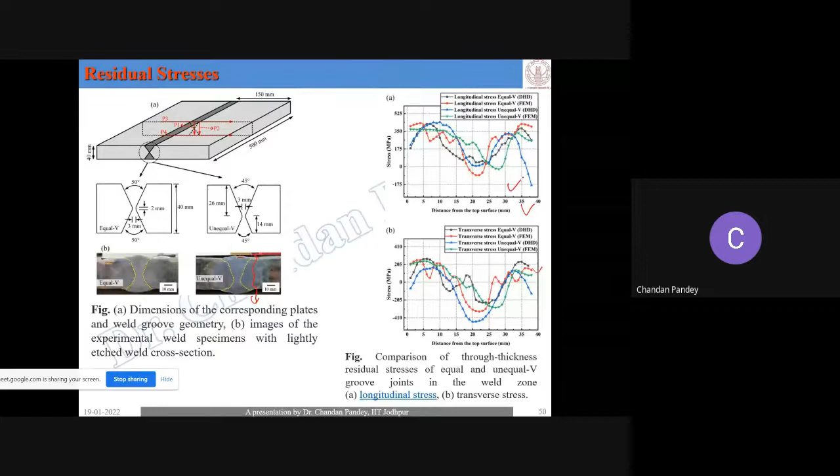This image shows the variation in residual stress along the thickness of the plate, where the plate thickness is more than 15 mm. As I said, for plate thickness more than 15 mm, we use a double V groove joint. In that joint, we can increase or decrease the cross-sectional area from the top and bottom regions, and see the effect of that change in groove geometry on the overall residual stress variation, both longitudinal and transverse, along the welded joint. This shows the variation along the weld joint, one along the thickness, and another along the transverse direction, covering the weld metal, heat affected zone, and base metal regions.

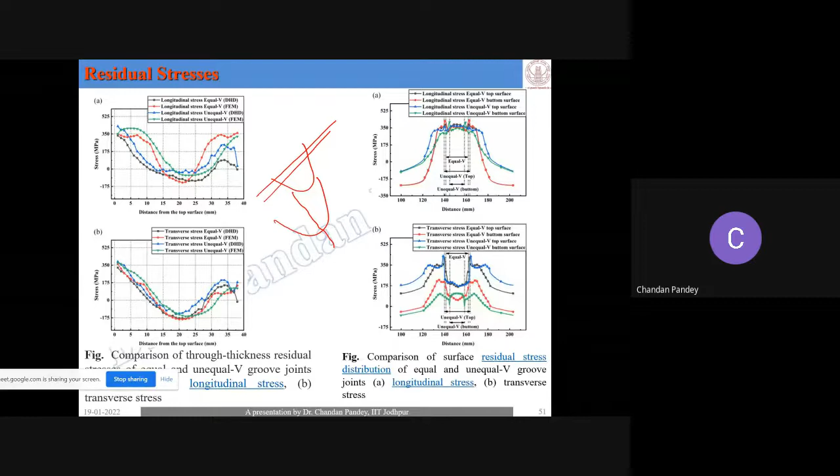The next topic is about dissimilar joints, specifically unmixed zone formation. This occurs mainly due to variation in composition between the filler metal and the base metal. Some portion of the base metal gets melted but remains unmixed with the weld metal and ends up in the weld metal region, creating heterogeneity. If this region is directly attached to the base metal, it's called a peninsula. If it gets terminated from that point, it's called an island. The major problem associated with this is the formation of the unmixed zone.

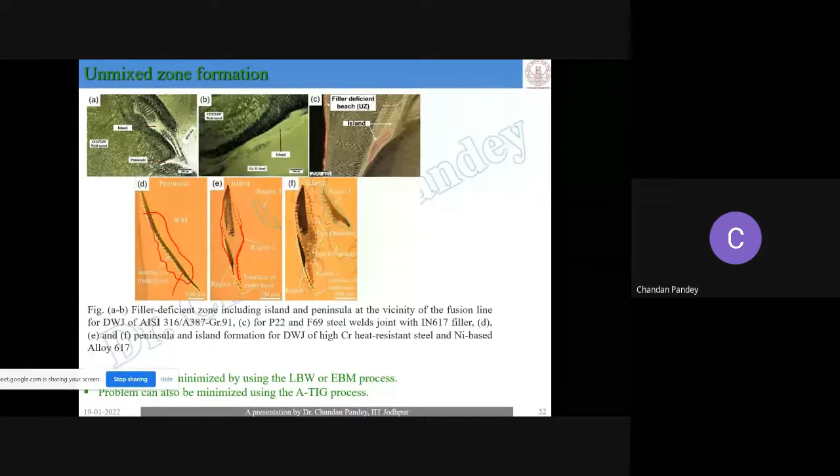How can we remove this unmixed zone formation in dissimilar joints? We can minimize it by using the autogenous welding process, because in that process we are not using any filler metal. This way, we can avoid the problem related to unmixed zone formation.

I'm going to stop here. There are many more things, but I think this is sufficient for now.